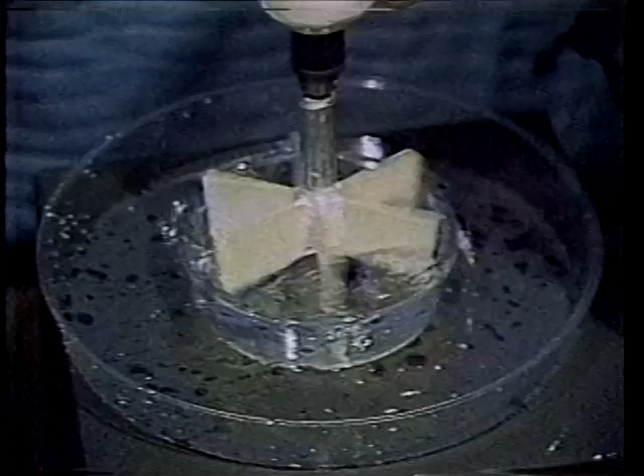First, there's work. Work is a force applied for a distance. So when we sling the bucket or turn an impeller to cause fluid to flow, we are doing work. All right, now for a new definition for a common word. The word is head. When dealing with pumps, we normally use the term head when referring to pressure.

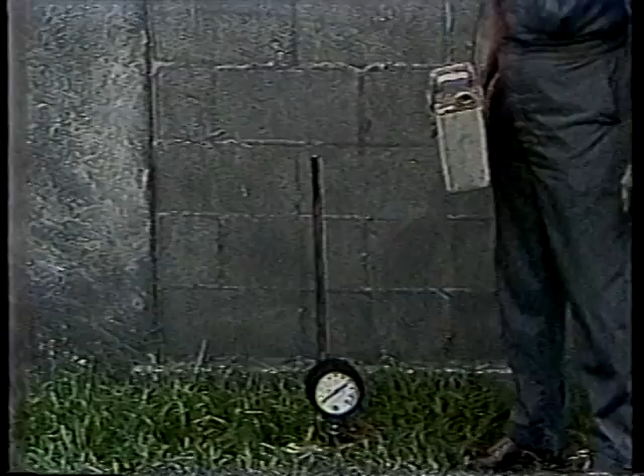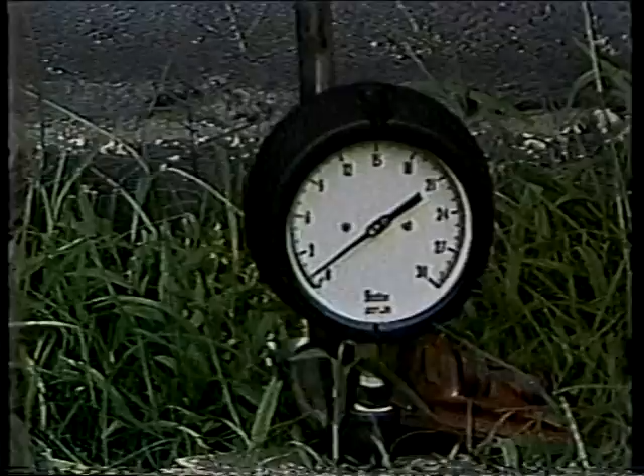This head is usually expressed in feet of water. We may also find pounds per square inch or PSI being used as well. The two methods of expressing pressure with centrifugal pumps are easily interchangeable. A head of 2.31 feet of water will exert a pressure of 1 pound per square inch. As you see here, this means that if we have a pipe 2.31 feet high full of water, a gauge at the bottom will read 1 pound per square inch. Or if we have a pipe 23.1 feet high full of water, the gauge will read 10 psi.

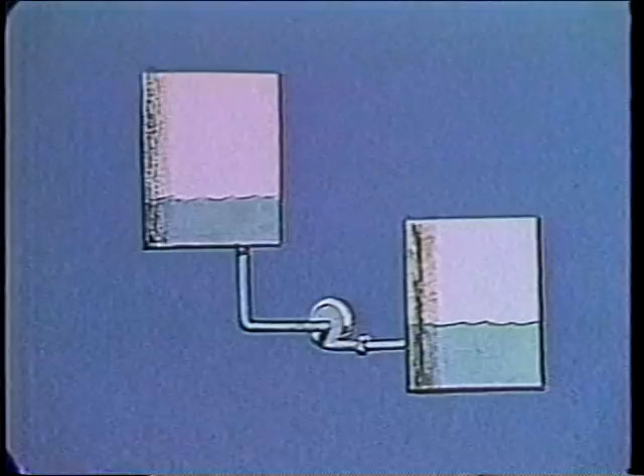Therefore, if our pressure is in psi and we wish to convert it to feet of water, we simply multiply by 2.31. On the other hand, if we start with feet of water and we wish our answer in psi, just divide by 2.31. Total head in a system is made up of three separate factors: static head, pressure head, and friction head. Friction head is in turn composed of three parts: friction in the pipe, entrance head, and exit head. To calculate the total head, we add up all the heads on the discharge side of the pump and then subtract from them all the heads on the suction side.

Okay, first of all, let's look at static head. Static head is the height that a liquid is raised to. Here we have a simple system where the suction is 5 feet above the pump and the discharge is 10 feet above the pump. The static head on the discharge side is then a positive 10 feet. On the suction, it's a positive 5 feet. So 10 minus 5 equals 5 feet total static head.

Okay, now what about the static head on a system like this, where our suction is 5 feet below our pump? Now the suction static is a minus 5 feet. So when we subtract a minus 5, it becomes a plus 5. So now we have a total static pressure of 15 feet.

In case you get mixed up on the signs, just remember, if the suction liquid level is above the pump, it will flow into the pump by itself, so it's subtracted from the work the pump has to do. If it's below the pump level, the pump will have to do the work to lift it, and therefore it increases the total static head.

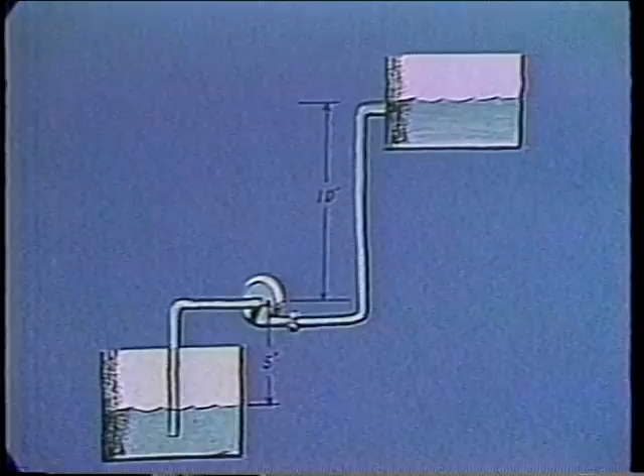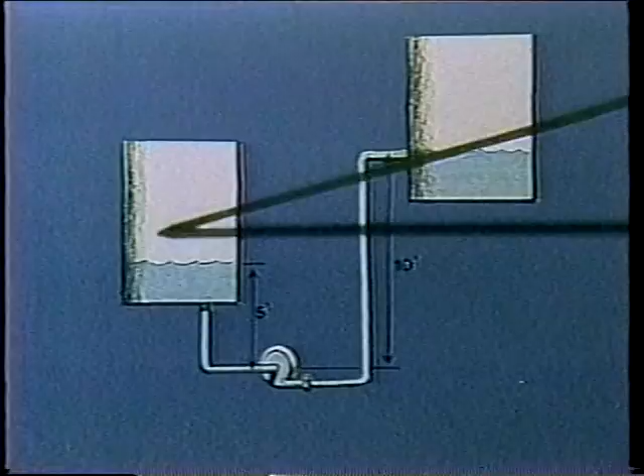Okay, now for pressure head. Pressure head has to do with closed tanks. On the system we were just talking about, we were pumping out of and into an open tank so that the water was at atmospheric pressure on both inlet and outlet. Right here, I guess, I'd better explain atmospheric pressure. This is the pressure caused by the air which is piled up on the Earth's surface.

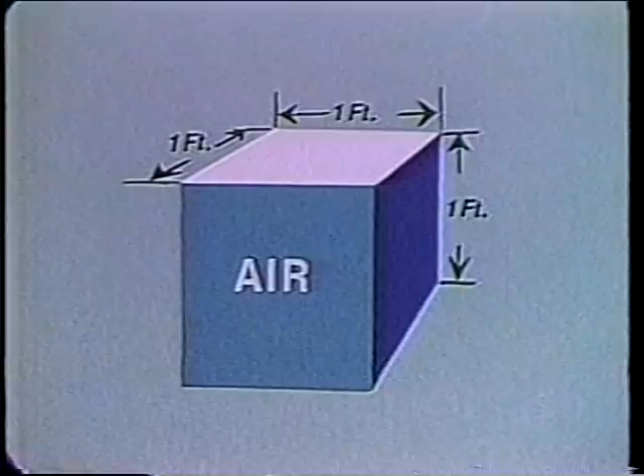We don't normally think of it this way, but a block of air, say a cubic foot in size, actually has a weight, although it's not very much. If you took several thousand of these blocks of air and stacked them one on top of the other, you would have a situation much like we have in the atmosphere, and a considerable pressure is developed. At sea level, and at standard conditions, this pressure is 14.7 psi. And at 2.31 feet per psi, this converts to approximately 34 feet of water. This pressure is called atmospheric pressure.

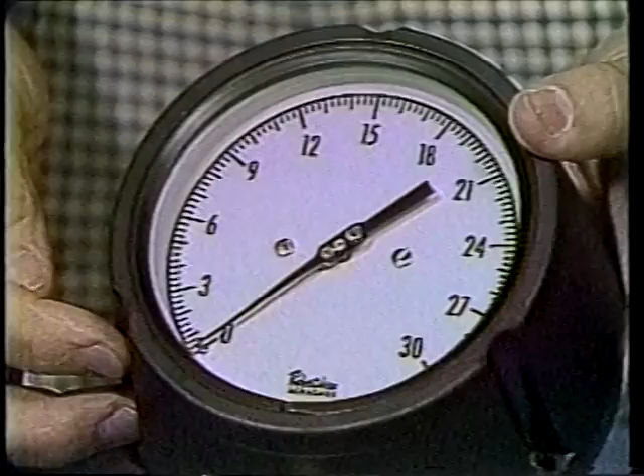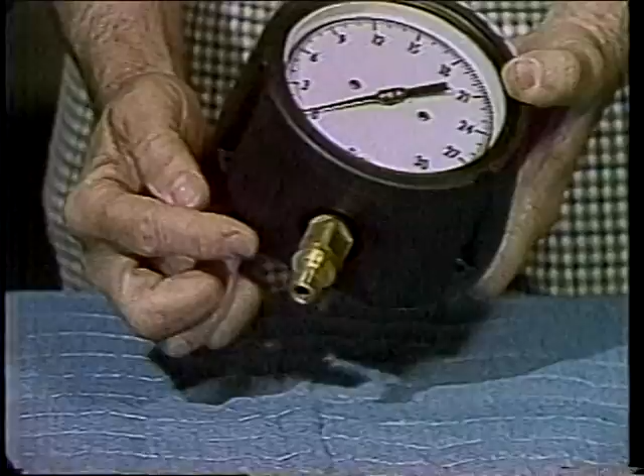As you can see, this gauge is reading 0, but we just got through saying it had 14.7 psi pressure on it caused by the air that's piled on the Earth's surface. It reads 0 because the pressure is on the outside as well as the inside of the gauge. Most calculations use what we call gauge pressure, which is the additional pressure beyond atmospheric pressure that a normal gauge would read either in feet of water or psi. There's another term which is sometimes used, and that is absolute pressure. Absolute pressure is gauge pressure plus the 14.7 psi atmospheric pressure.

Okay, back to pressure head. Now let's say we have a system like this, where we're discharging into a closed tank, and we want to develop 100 psi, which we will read on the gauge right here.

Since the inlet and discharge are at the same level as the pump, there is no static head involved. For the moment, let's disregard the other losses and consider only the pressure head. Since the suction is open to atmosphere, it has 0 gauge pressure. The discharge reads 100 psi on the gauge, so the pump will have to develop 100 psi.

If the discharge pressure we wanted to develop had been 114.7 psi absolute, the pump would have still only had to develop 100 psi, since 114.7 psi-A equals 100 psi-G.

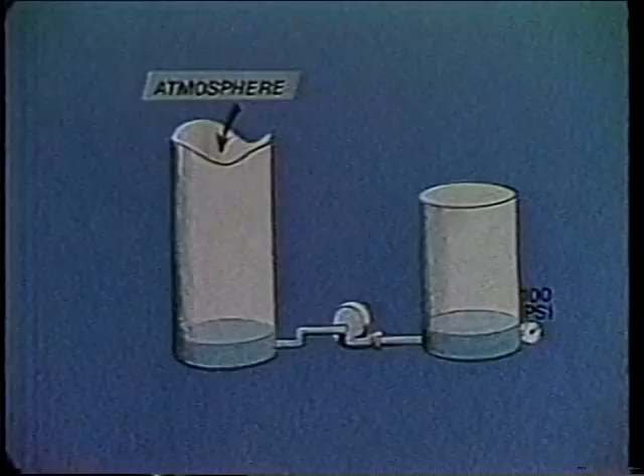Suppose we have a system like this, where the suction side is not open to the atmosphere and we're reading in psi absolute, while the discharge is in psi gauge. We'll have to convert them both to either gauge pressure or absolute pressure in order to calculate total head. Here's how it would go.

Suction pressure head equals 64.7 psi-A, pounds per square inch absolute. 64.7 minus 14.7 equals 50 pounds per square inch gauge. The pressure is positive, so we put a plus sign in front of it. Now we have 100 psi-G discharge pressure head, so our total pressure head is once again discharge minus suction, or 100 minus a plus 50 equals 50 psi-G.

For ease in the rest of our calculations, we convert this to feet of water by simply multiplying by 2.31, which gives us 115.5 feet.

Now let's look at the rest of the losses in the system. First, there are friction losses. These are caused by the fluid rubbing on the pipe and valves. The amount of the losses can be found in tables in most hydraulic handbooks.

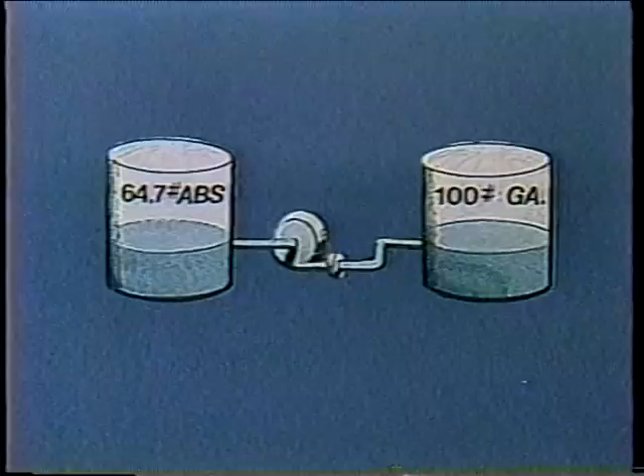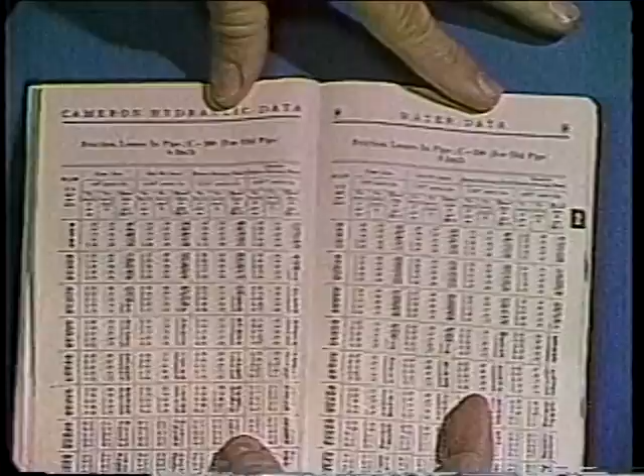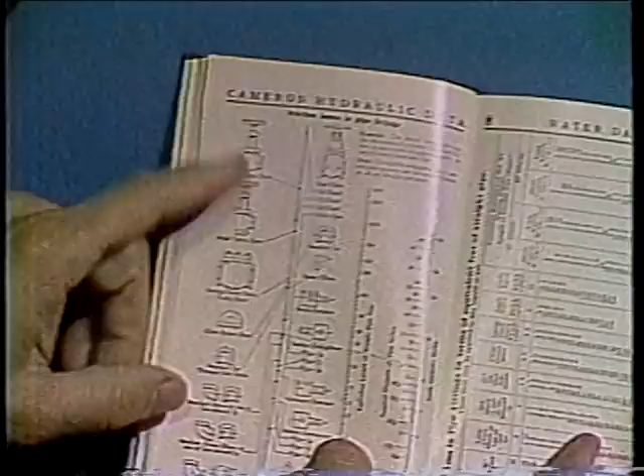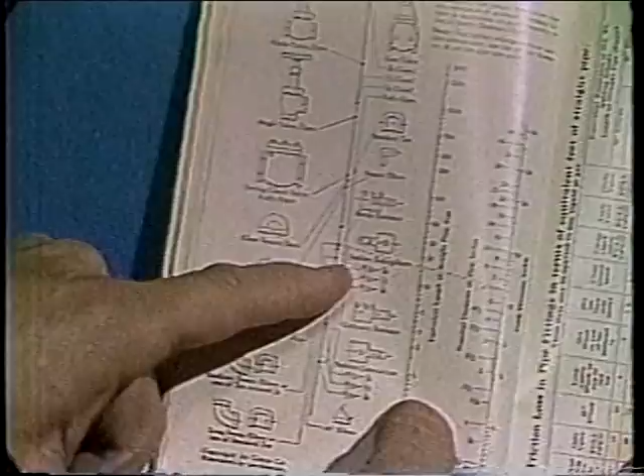Cameron Hydraulic Data Book is one of the more widely used ones. The losses are usually given in tables as so many feet of water pressure loss per 100 feet of pipe. The extra loss caused by fittings and valves is given in terms of equivalent lengths of pipe. For example, a globe valve might have the same loss as, say, 22 feet of pipe. Entrance and exit losses are the additional losses caused when a fluid enters or leaves a pipe. The tables also give an equivalent length of pipe for these losses.

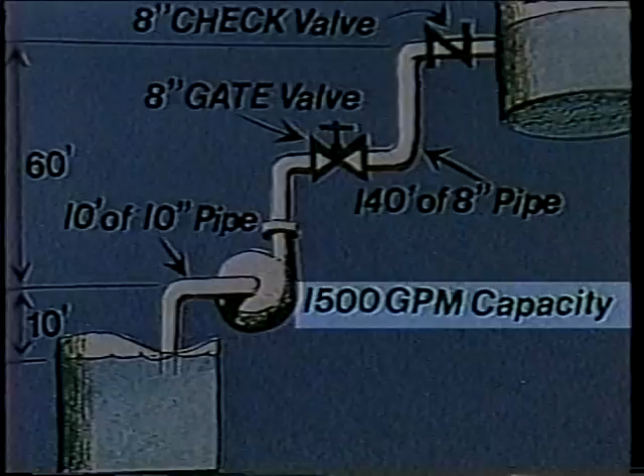Let's look at an example which has all the different factors we've discussed. Let's say we want to pump 1,500 gallons per minute. First, there is discharge static head, which is 60 feet. The discharge pressure head is 26 psi-G.

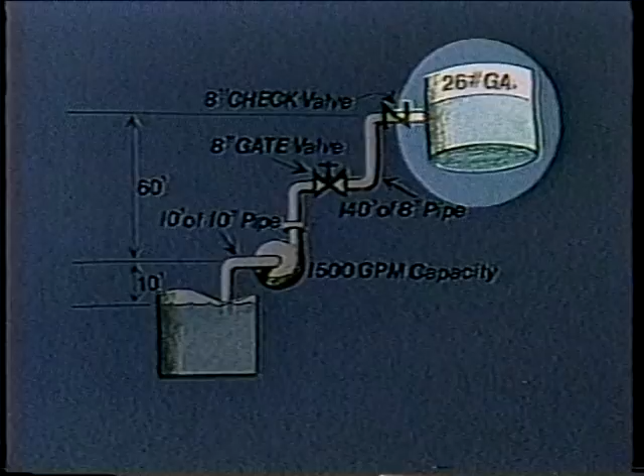Let's convert the 26 psi-G to feet. When we multiply it by 2.31, we get 60 feet of water.

We have 140 feet of 8-inch pipe here on the discharge side. From the handbook, we find that an 8-inch pipe handling 1,500 gallons per minute has a loss of 6.32 feet per 100 feet of pipe. So, since we have 140 feet of pipe, we have 6.32 times 140 divided by 100, which equals 8.8 feet.

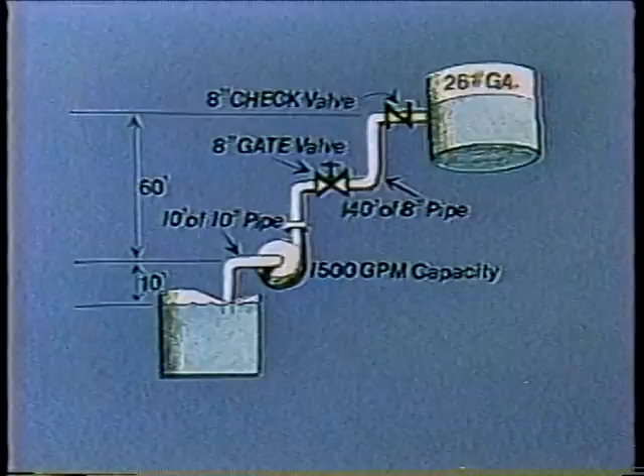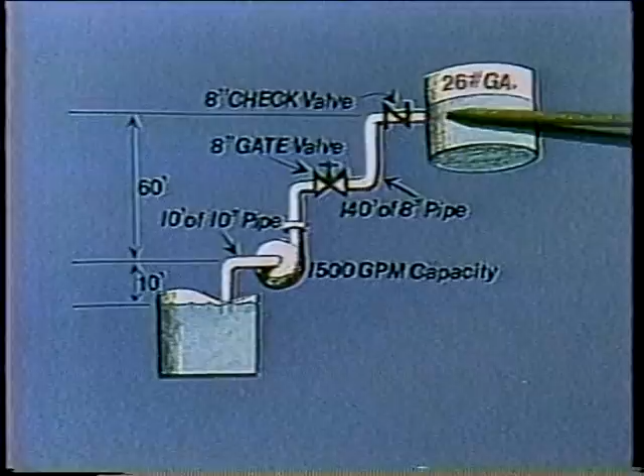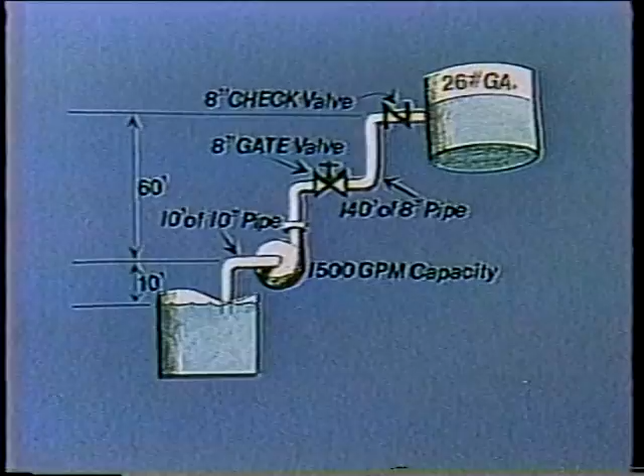Now for the suction side. First off, we have minus 10 feet of suction static head. Since the suction tank is open to atmosphere, we have 0 suction pressure head. So we record these 2 facts. We've got 10 feet of 10-inch pipe. The handbook shows the loss to be 2.1 feet per 100 feet of pipe. So we have 2.1 times 10 over 100, which equals minus 0.2 feet.

One 10-inch elbow has a loss of 0.5 feet, and the entrance loss is 0.6. When we add all these up, we find that we have a total suction head of minus 11.3 feet.

Our total head then is discharge head less suction head. So we have 137.9 minus a minus 11.3, which gives 137.9 plus 11.3, or a total head that the pump will operate against of 149.2 feet. If we want our answer in PSI, we divide by 2.31 and we get 64.6 PSI.

Calculations of the total head for any type of system are essentially the same as this one. Just break the losses down into individual parts and then add them all up, being careful to keep the sign correct. Then you finally subtract the suction from the discharge.

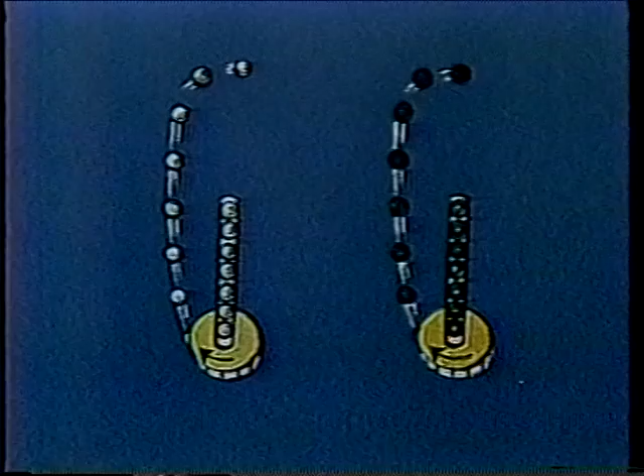Here's an important statement which has to do with specific gravity. It's worth remembering. A centrifugal pump with a given impeller, speed and size will develop the same head in feet, no matter what the liquid or its specific gravity. Now obviously this rule doesn't apply to high viscosity materials like cold molasses. To illustrate this rule, let's look at a sketch.

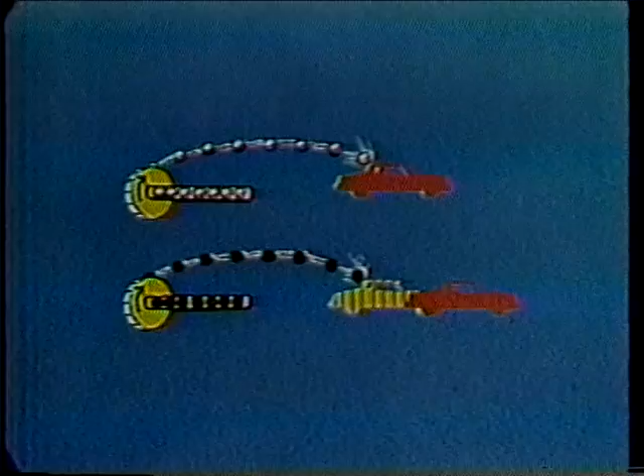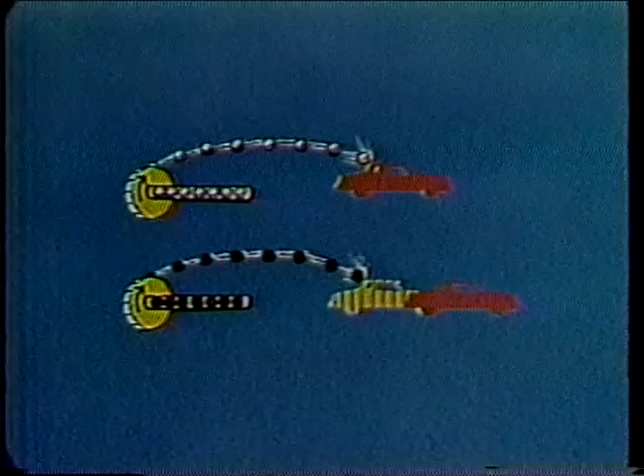Here let's imagine that the black balls are water and that the white balls are gasoline. Since they both leave the impeller traveling at the same velocity or speed, they will both be thrown to the same height. If the balls leave the impeller and travel in a horizontal direction, they'll both be thrown the same distance. But now, if we put our toy auto in front of them, the greater pressure will be exerted by the black balls, since they weigh more. That is, they have a higher specific gravity. Therefore, we can see that we develop a higher discharge pressure with the water pump, although both are pumped to the same height in feet.

Hydraulic horsepower is the work required to change a liquid from one elevation, pressure, and velocity to some other elevation, pressure, and velocity in a given time. This formula will determine the hydraulic horsepower for any liquid. It is: hydraulic horsepower equals GPM times total head times specific gravity, divided by 3,960.

Brake horsepower is the actual horsepower required at the pump shaft to drive it. Brake horsepower includes all the losses in the pump itself. These include losses due to friction and turbulence of the liquid in the pump and friction of the packing and bearings. The ratio of the delivered horsepower to the input brake horsepower gives us the efficiency of the pump. Okay, now back to our original statement.

A centrifugal pump with a given impeller, speed and size will develop the same head in feet no matter what the liquid or specific gravity. This means that even though most all pump performance curves are figured using cold water, if you're handling a liquid at a different specific gravity, you can still read capacity in GPM, the total head in feet of liquid, and the efficiency directly off the curve without any adjustment. Brake horsepower will, however, have to be multiplied by the specific gravity of the liquid being handled.

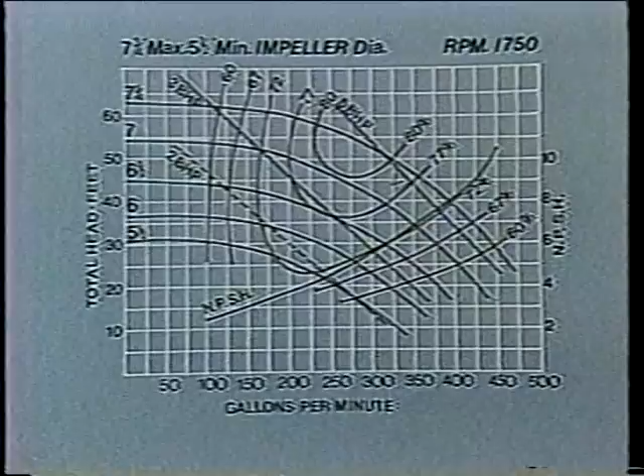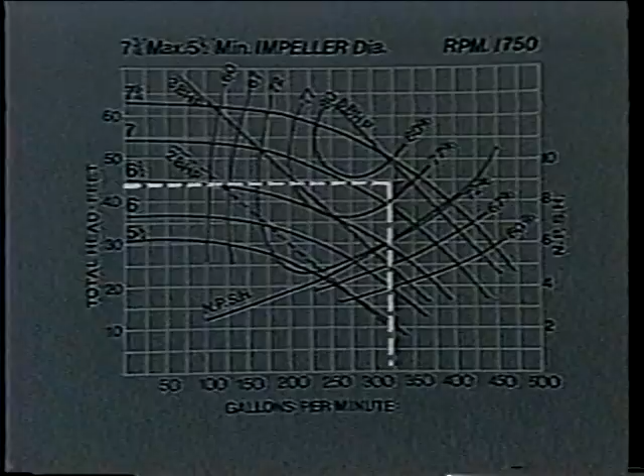Say we want to pump 325 gallons per minute, and we calculate our total head to be 44 feet. We would enter the curve right here at 325 and go up until we cross the 44 feet horizontal line, which shows us that this pump, with a 7 3/4 inch diameter impeller and a 5 horsepower motor, will do the job. The efficiency would be approximately 78%.

Now you will notice that there are several different diameter impellers plotted on this same curve, which brings up another point. We can change the performance of a given pump by changing the speed at the periphery or edge of the impeller. This can be done in one of two ways: change the impeller diameter or change the RPM.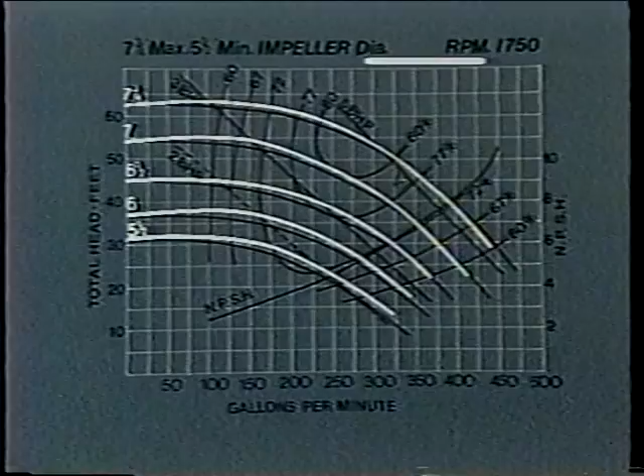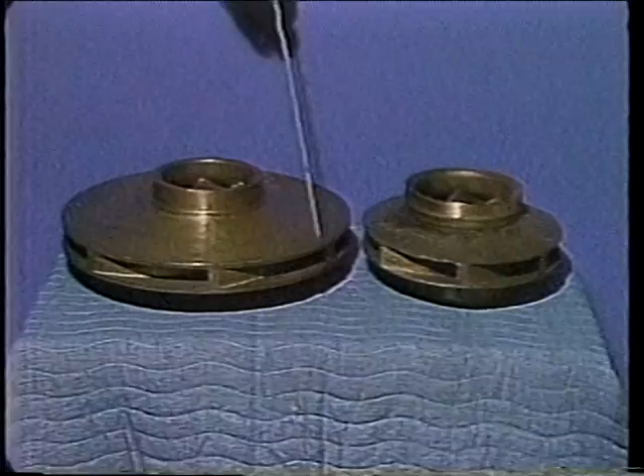First, let's look at changing the diameter of the impeller. The impeller for a given pump is cast a certain maximum size, and then for any diameter less than that, we simply set it up in a metal cutting lathe and machine it down to the desired diameter. There are, of course, limitations to how large and how small you can go, but if you stay within the limits as shown by the manufacturer's curves, you'll be okay. As you can see from the curve, the smaller impeller diameters require less horsepower.

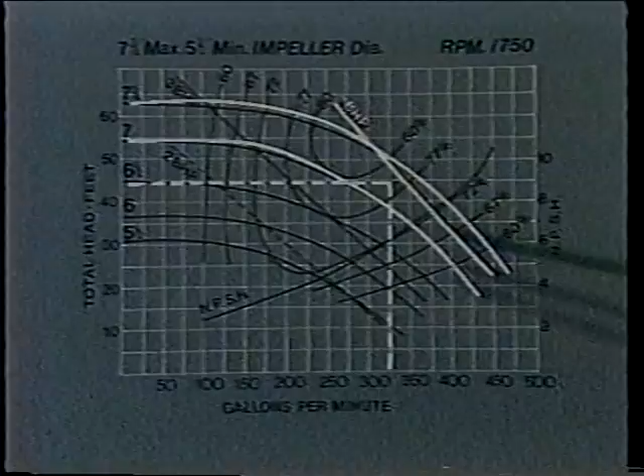Normally, when a different impeller diameter is required, we can interpolate directly from the curve, which means we pick it off between the plotted points. Okay, back to our pump selection. Since right here is the point at which we want to operate, and it's midway between the 7 3/4 and 7, we can see a curve approximately halfway between would be for an impeller 7 3/8 inches in diameter.

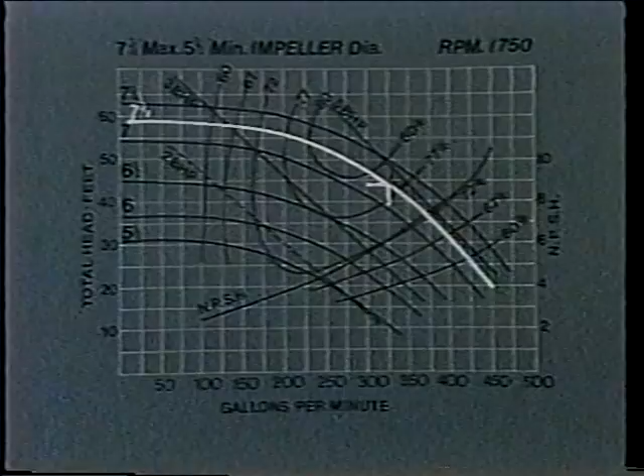So we just draw it right in, and we find that a 7 3/8 impeller would produce exactly our requirement of 325 gallons per minute at 44 feet head. In this case, trimming the impeller down to 7 3/8 has an additional advantage.

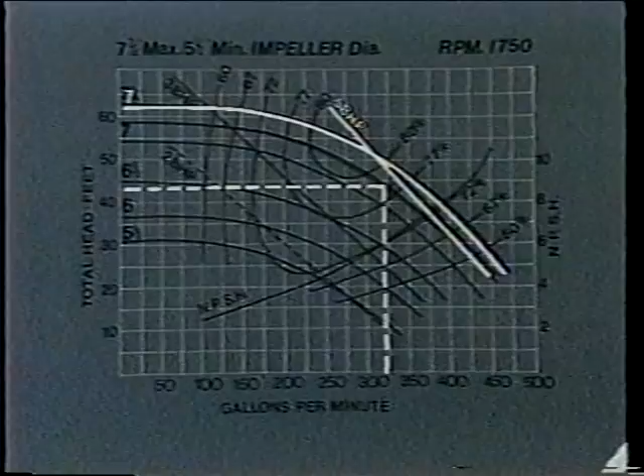Let's assume that we had left the impeller at 7 3/4 inches. As long as the speed is constant, the output from a pump will always fall at some point on the curve for that particular impeller diameter. Now, instead of producing the 44 feet head, which we require, the head developed by the pump will be somewhere along this curve. And since there is more head than 44 feet here, there will be more flow than calculated because more pressure will shove more water through the pipes. So we will actually be operating at some point along here.

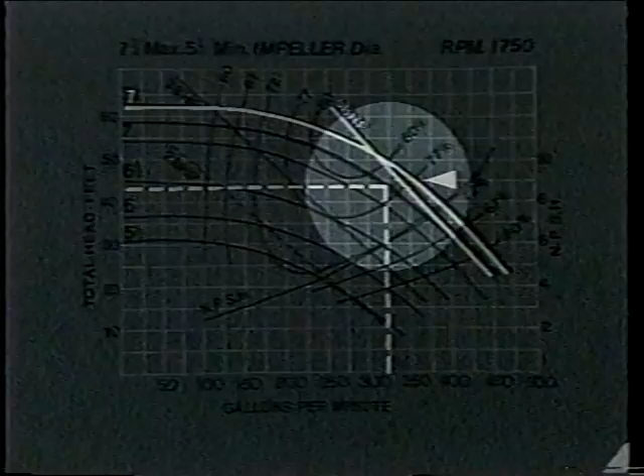Now notice we are above the 5 horsepower curve, and therefore the motor will be overloaded. Above the horsepower curve means overload. Anywhere below it is okay. I should remind you of something right here. While you may get away with continuously overloading an open drip-proof motor 5 or 10%, if you put a totally enclosed or explosion-proof motor of the same horsepower in an overload condition, you'll burn it up for sure. This is true because there's no overload safety factor designed into totally enclosed and explosion-proof motors.

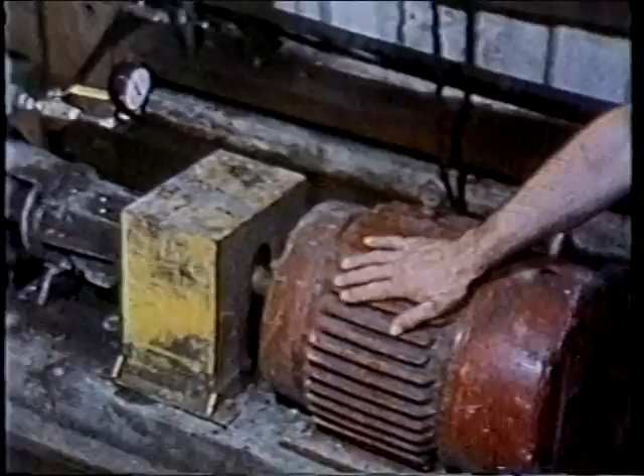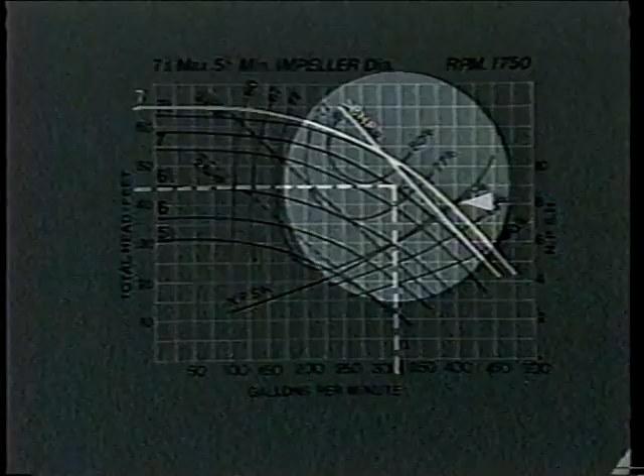A common mistake is for a mechanic to see an application where the motor is heating up and say to himself, the pressure is too much. So he opens up a valve which allows more flow, moves us out here on the curve, and then he really does burn the motor up. Remember, in the normal operating range of most impeller designs, increased flow usually means increased horsepower.

If you want to calculate what a change in impeller diameter will do to the performance of a pump, here are the rules. A, the flow in GPM will vary directly as the diameter. That is, cut the diameter 10% and you'll cut the flow 10%. B, the head varies directly as the square of the diameter, which means that double the diameter and the head is 4 times as much. C, the horsepower required varies as the cube of the impeller diameter. For example, if we double the impeller diameter, we will require 8 times the horsepower. D, the efficiency remains the same for small changes.

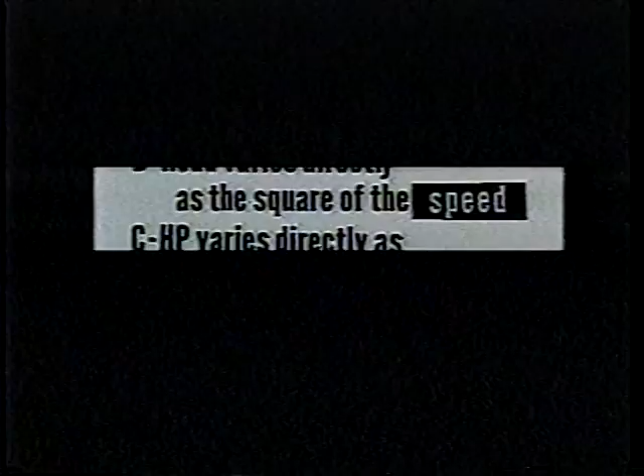The other way to change the speed of the edge of the impeller is by changing the speed of rotation of the impeller. Here, as was the case with a change in impeller diameter, A, flow changes directly as the speed. B, head varies directly as the square of the speed. And C, power varies as the cube of the speed. D, efficiencies are unchanged for small changes in speed.

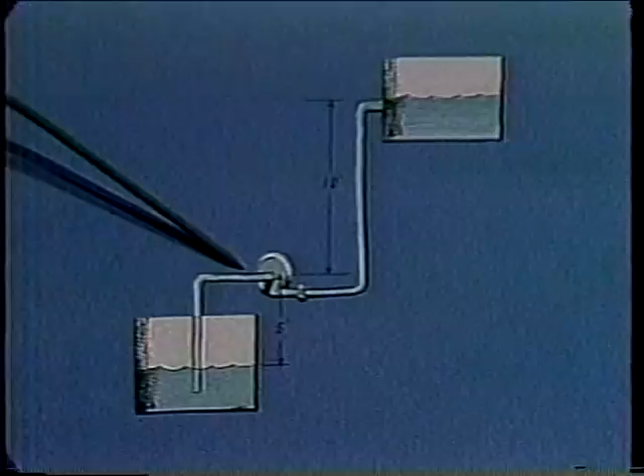Okay, for one final explanation, net positive suction head. This term is usually misunderstood by purchasers of centrifugal pumps. Net positive suction head, or NPSH, is the absolute pressure above the vapor pressure of a liquid being pumped, measured at the pump suction flange on a gauge at the pump center line. The suction side of a pump doesn't actually suck up anything. What happens is like when you drink a soft drink through a straw. A partial vacuum is created, and atmospheric pressure forces the drink up the straw.

Okay, what does that mean? Well, with cold water at sea level, we start off with atmospheric pressure, which is 34 feet, and deduct all the losses along the way until we get to the pump flange, and what's left is the net positive suction head. There must then be enough of the atmospheric pressure left when the liquid gets to the pump flange to force the liquid into the pump. Each manufacturer calculates the minimum NPSH required to move the liquid into each pump under varying flow conditions, and usually puts it right on the pump curve. For example, our pump at 325 gallons per minute would require an NPSH of about 9 feet.

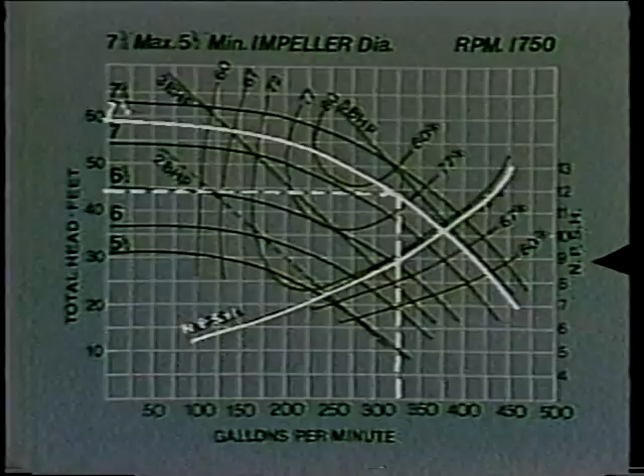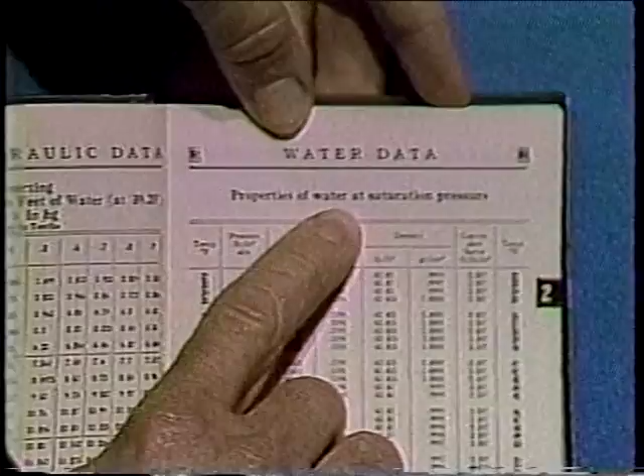When calculating NPSH, differences in vapor pressures must also be considered. For example, Cameron's handbook shows water at 150 degrees has a vapor pressure of 3.7 psi, which is 8.5 feet. So if we're pumping 150 degree water, when we get to the pump flange, we must subtract an additional 3.7 psi, or 8.5 feet of water from the gauge reading to determine how much is left to force fluid into the pump. Also, at higher elevations, say like in Denver, there's less atmospheric pressure because less air is piled up above us. There, we would start off with only 24.5 feet available pressure instead of 34.

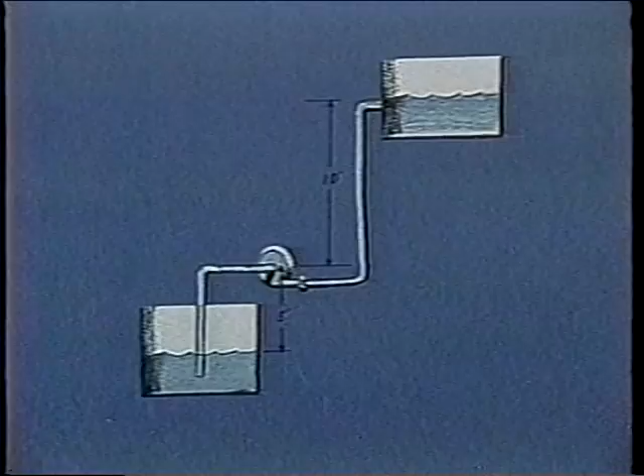If you're having problems with noise or erratic operations, then it's quite possible you don't have sufficient net positive suction head. You can determine what your NPSH is by installing a vacuum gauge at the pump suction flange and subtracting the gauge reading from atmospheric pressure, after taking into account any differences in elevation or vapor pressure. This ends part 2 of centrifugal pumps.